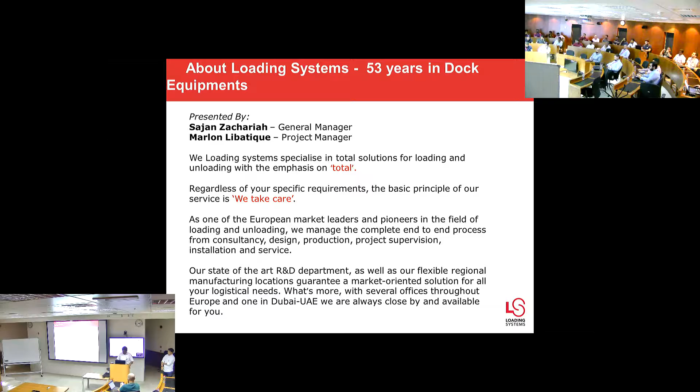So this company was established in 1965 in Netherlands. That means it's a 53-year-old company, and run by twin brothers, and it's still running as a family-owned company. And of course, we are one of the three major manufacturers of doors and dock equipment in Europe and in the Middle East, and we have factories.

We have got 3 factories, and the major factory is in Netherlands. The place is called Lelystad, which is an industrial area. So there we manufacture our dock levelers and dock shelters and all those dock accessories which you would see further down in the presentation, like dock lights, traffic lights, wheel guides, bumpers, wheel chocks, etc.

And then our doors are manufactured in Czech Republic. We have a very huge factory in Czech Republic, which manufactures almost 70% for our own use, and 30% we are even manufacturing doors for other vendors or other manufacturers from Europe, under their name.

And we have another factory in Germany which manufactures our manual drawbridge levelers. Few of you know that sliding dock levelers are coming from the German factory, including the lift tables, etc.

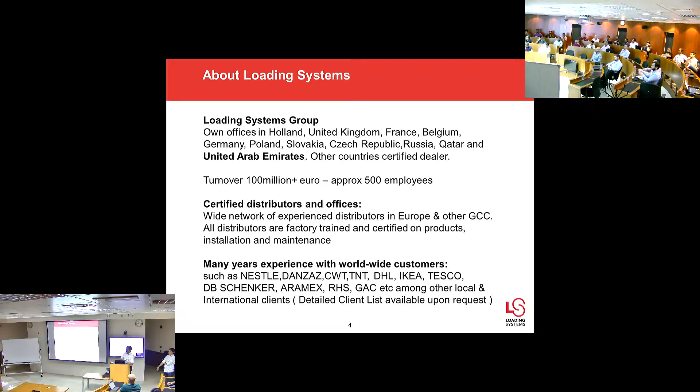So this is the scenario of our group actually.

By flexibility we mean result oriented. It's a result oriented company, and we make fast decisions. And as I informed you already, it is still running as a family-owned company. Even I can talk to the owners, even you can talk to the owners. So it's very flexible in our company, that down the line we are very clear. Anyone is anytime accessible, approachable, and we always talk with the customers.

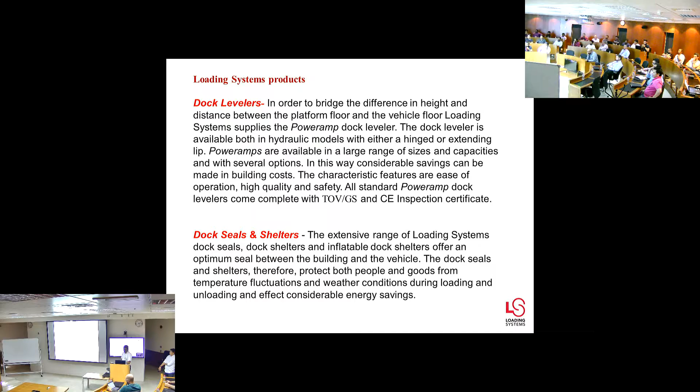Then we manufacture dock seals and shelters, which seal the container and the building in cases of special docking requirements like freezer environments, chiller environments. These dock seals give you protection against dust, contaminations, flies, etc.

And then we have a power lock. So power lock is a new item which I think we have not introduced in this market that much, because the requirement was very less. I will show you the video of the power lock, the functions of power lock.

Basically, the power lock is used when a truck is docked on a particular dock station and loading unloading is happening, and if it is still continuing, maybe the driver is going to pick up some items or is coming back. There are a few cases where the truck driver may not know that loading or unloading is still happening, so he may take the vehicle away. In our technical language, we say premature departure of vehicles, or vehicle creeping.

So this power lock is a lock which holds the truck even if the driver tries to move it. It's just like a stopper, but it's actually a hydraulic system which suddenly activates. The moment the driver takes the truck, it senses and it holds it back.

Then industrial sectional overhead doors, which are insulated overhead panel doors. You've seen these, they're always present in all of your projects.

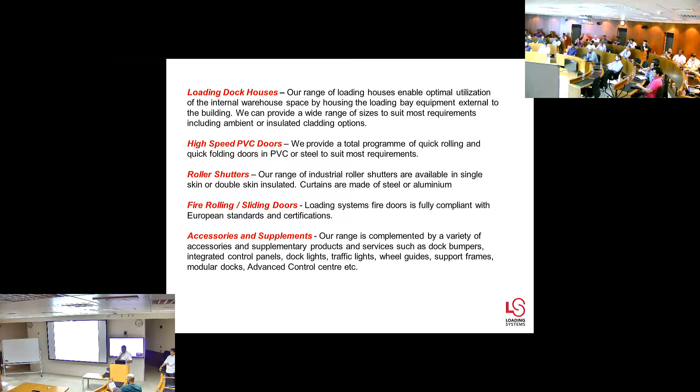So we have special doors which I'll come back to. Then we have the standard rolling shutters, then fire rated rolling shutters. And in fire rated we also have different types, like single skin fire rating roller shutters, insulated fire rated roller shutters, then fire curtains, and a few of your projects now ask for fire curtains as well. Then accessories which I mentioned before, like dock bumpers, traffic lights - red and green road signals, then dock lights, wheel guides, etc.

Anyway, I'll move a little bit quicker. Then I just wanted to show you the video of our factory.

This is our factory in Netherlands, which manufactures dock levelers and shelters.

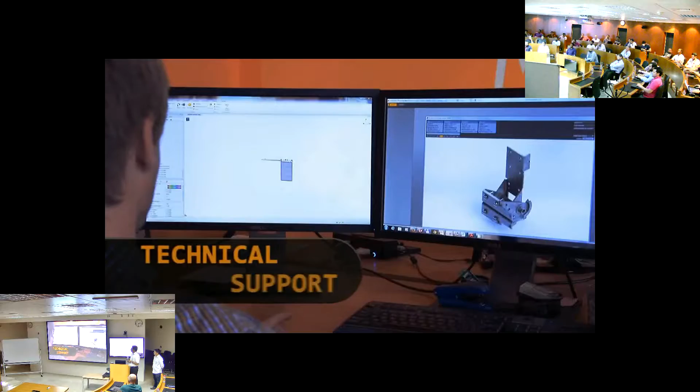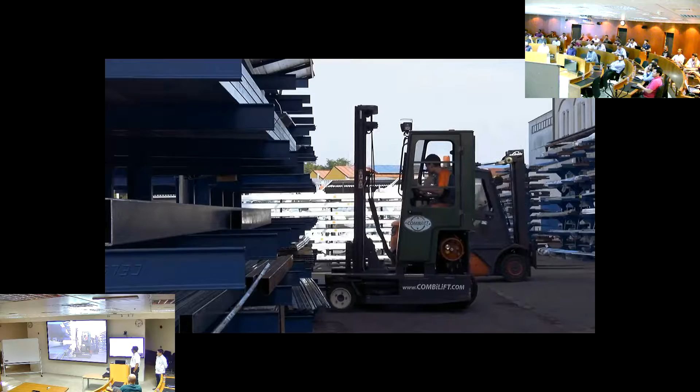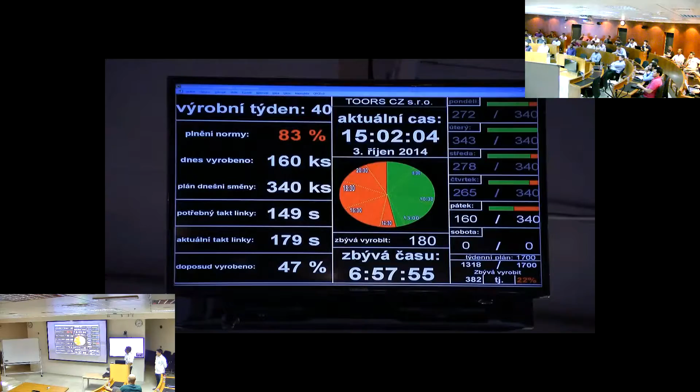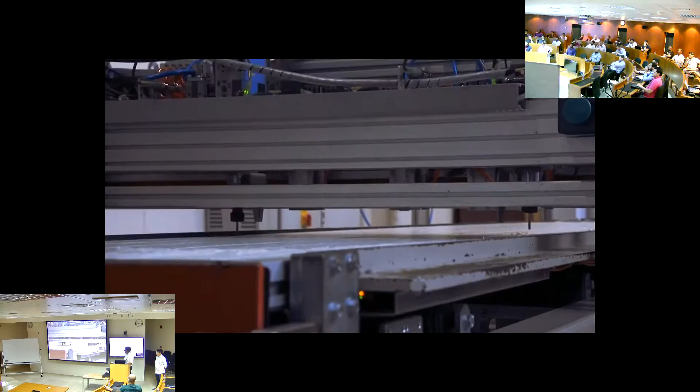Sorry, this is the door factory in Czech Republic. So that was our door factory in Czech Republic.

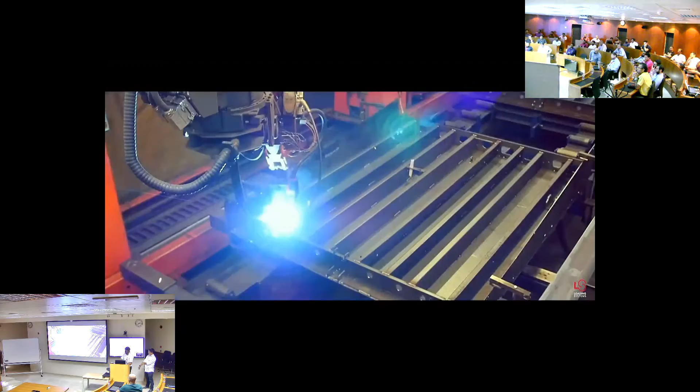Besides our own production facilities in the Netherlands and the Czech Republic, we operate from 12 international offices, which include Russia, Dubai, and Qatar. We manage the complete end-to-end process from consultancy, design, production, supervision, installation, and service. It is to supply our customers a solution for their specific situation around the world.

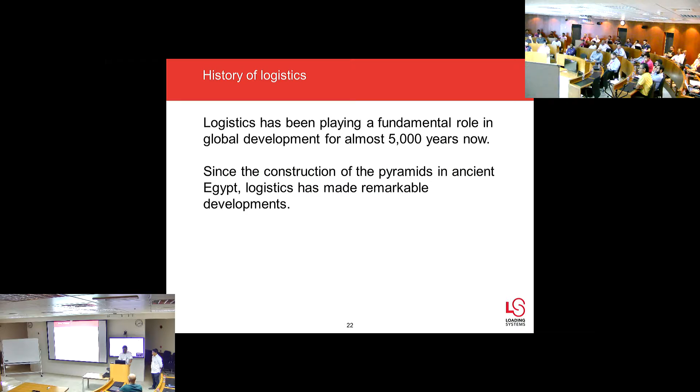So just let me take you through what logistics basically is. All this idea came from logistics - why a dock leveler is required, why a door is required, why do you need this or that. As you know, logistics has been around for almost 5,000 plus years. Logistics means production, packaging, inventory, transport, warehousing, security, material handling - everywhere logistics is involved. But we are talking about the material handling part of that logistics where we produce our items.

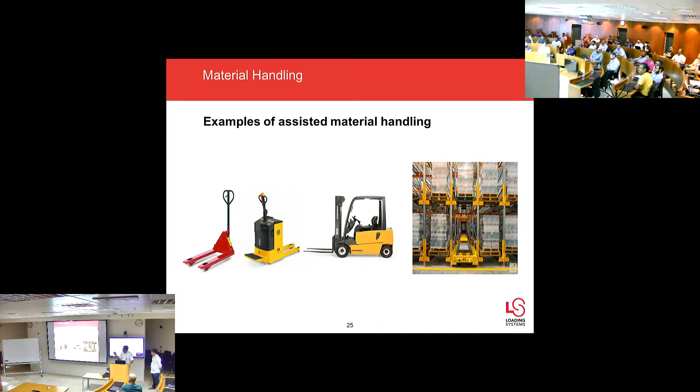And of course there are different types of material handling. You know these products already, which you are using in our warehouses for material handling. There is manual loading, semi-manual loading, and assisted material handling.

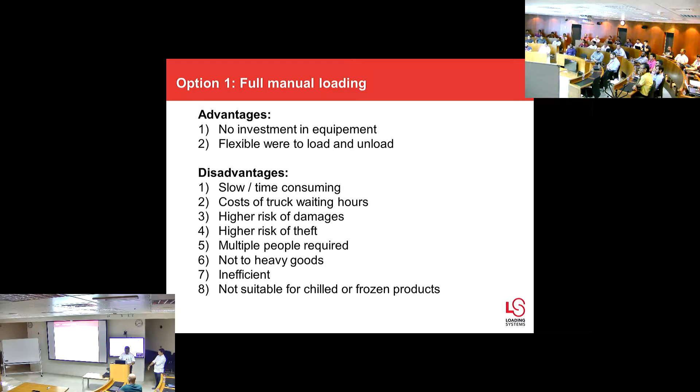They charge you more for the waiting hours, higher risk of damages to the people and materials, higher risk of theft, and multiple people are required for doing all these things. It's not advisable for heavy goods by fully manual loading. When you look at the current situation, it was totally an inefficient way of handling materials.

Not suitable for chilled and frozen products, where you have to go through a lot of safety hygiene standards. So just to show you how it was when you go for manual loading in the container, it takes 4 to 6 hours, minimum 3 people required, and you can't even add more people, they may cross each other.

This is just a photo of two people unloading frozen foods, which nowadays nobody would accept, this kind of loading and unloading with a human touch on food items.

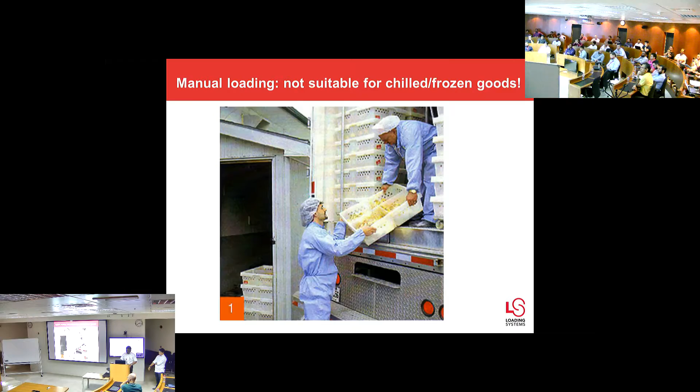Because of these things, the market has developed into today's requirement of dock levelers, fully automated dock levelers. You can see that even Amana is into a lot of warehousing projects with temperature controlled warehouses and cold rooms. Nowadays the trend of the market, even for the Middle East, the requirement is more coming on temperature controlled warehouses and logistics facilities.

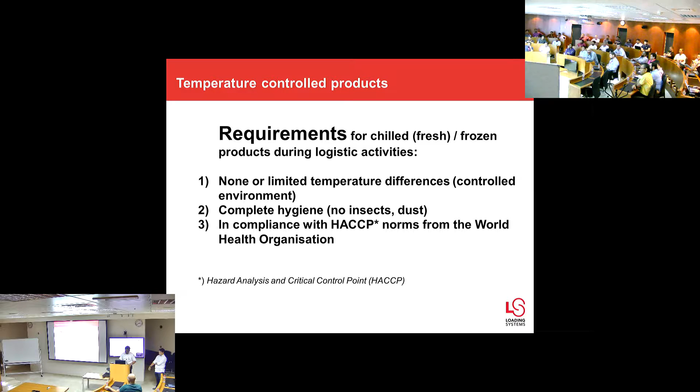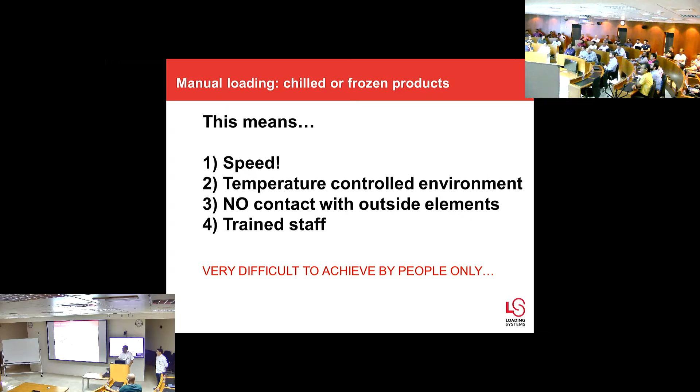For chilled and frozen foods, you need dock openings which can manage temperature control, and trained staff who will not allow any contacts with outside elements. The speed matters too, because due to business volume they need to move the truck very fast, and all this needs either a semi-manual material handling with the help of people and equipment.

Then comes the assisted material handling, which is the quickest way with the help of dock equipment. I hope most of you know what a dock leveler is. Just if you want, I'll show you.

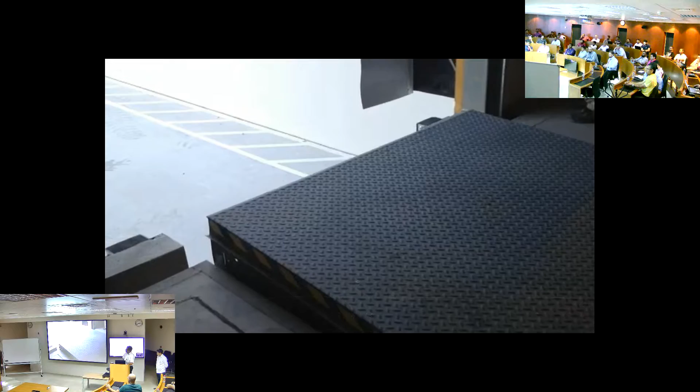So this is a photo, I think from one of your projects. I think this is from the Diesel Technique project video.

So this is one of the dock levelers. We have a telescopic lip which can even go to 1 meter from the warehouse floor. This lift covers the distance between the truck and the warehouse. You can take your forklift inside the containers, and it can go up and down to adjust the gap, the height difference between the warehouse floor and the truck, because nowadays the trucks are all coming in different heights.

Even some trucks from Mercedes have a very high truck bed. Some other companies like Amana keep different height levels. So for a warehouse where you get multiple trucks in, right from 7 ton to 10 ton, to 20 foot, 40 foot container trucks, and some high cube containers now, the truck bed is even going up to 1.7. The truck bed itself is 1.7 nowadays from Mercedes, used for freezer containers. So you need a dock leveler to adjust the height distances.

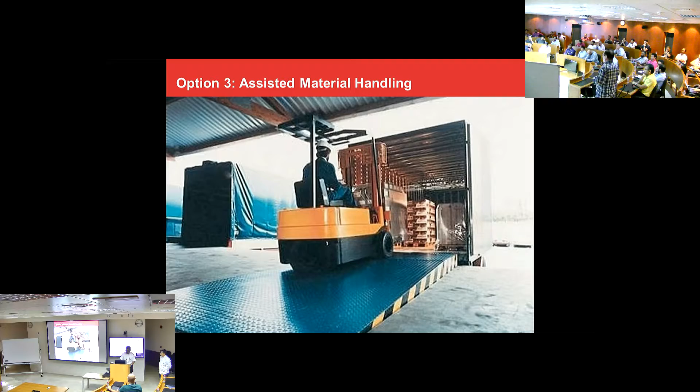Regarding advantages and disadvantages, since it is all automated, it is quicker, faster, and safer.

This is how a normal dry store opening looks like nowadays. We have a sectional overhead door, the white colored one, a dock leveler, and on the side you will see the bumpers. The truck hits the bumpers, which are rubber, and stops there. Then you open the door and start the dock leveler, which goes and sits inside the truck bed.

This is what we use nowadays for cold room warehouses, where you add a dock shelter, which you can see when a container is docked. That shelter is a manual arrangement, like a drive-through shelter, where the shelter flaps cover the container. So the temperature and energy are saved to some extent. It's not a 100% solution, but for a normal cold room or ambient temperature controlled warehouse, it is fine.

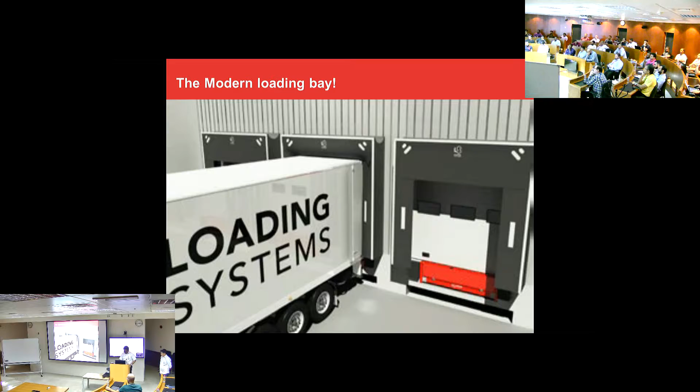This photo is from one of your projects, Diesel Technique, where you can see we have a dock solution where the doors can go up to ground level or even higher, so that the dock leveler is behind the doors. These are important when energy saving is a concern.

We used the same mechanism in another of your projects, Transmat. You can see the blue colored dock leveler. When you open the door, you will see the dock leveler; otherwise, the door is an insulated sectional overhead door that protects the outside and inside temperature when closed. When the truck comes, the door opens, the dock leveler is sitting behind the door, and then there is direct contact between the truck and the building.

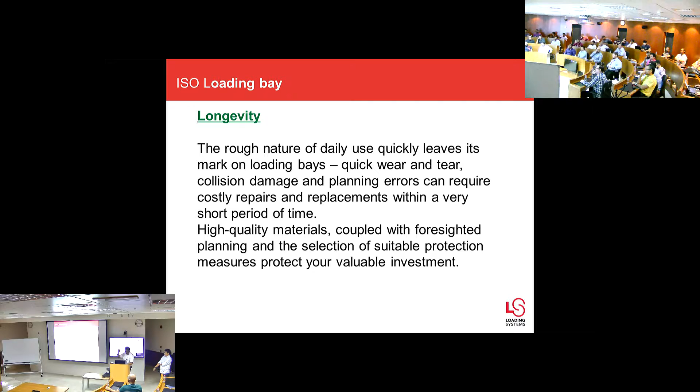Now the new trend is the ISO loading bay, where the door closes in front of the dock leveler.

I'm just introducing the products for now; we can go into the technical details later.

We also make doors. If the project requires it, you can have a door inside the door, like this main door, which you open and close only when required. Otherwise, people can use this pass door for going in and out.

This is what I've been telling you about, the ISO docking solution. The door comes in front of the dock leveler, where you can have a door closing up to the interlock level, or you can make a subfloor, keep the dock leveler on the subfloor, and have the door close over it.

This is the arrangement. This is basically the civil part, which the contractor normally does for us, like making the cutting for the door to pass up and down.

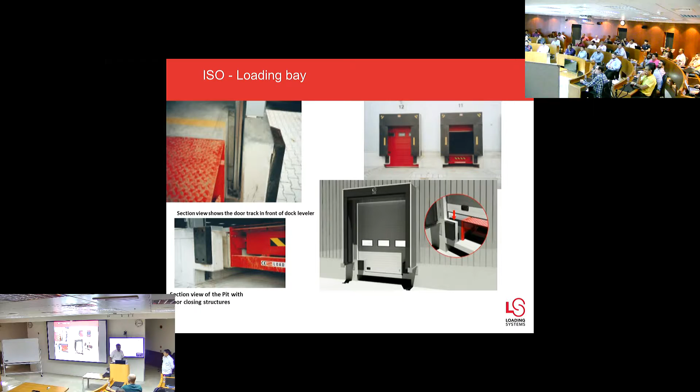In extreme requirements, we even do PU insulation underneath the dock leveler platform to avoid condensation on the platform. When the closed door suddenly opens in the hot temperature of Dubai, hot air pushes into the warehouse, making the platform wet. So we use PU insulation underneath the dock leveler to avoid that issue.

This is called stepped docks, which is the extended version of the ISO door.

We use the same modus operandi here, with the exception that normally the truck comes and docks, and before docking, the driver comes out, opens the container door, and then drives back or parks it in front of the dock leveler.

Nowadays most distribution companies don't want to do it that way, because we have sandstorms here, we have rain, and we have problems with food. When the driver comes for a 40-foot container, he walks all the way to the rear to open the container door, then walks back to the cabin. It takes time, and by then, if there's a sandstorm, sand or flies can get inside, especially with meat hanging in the container. A lot of issues can happen.

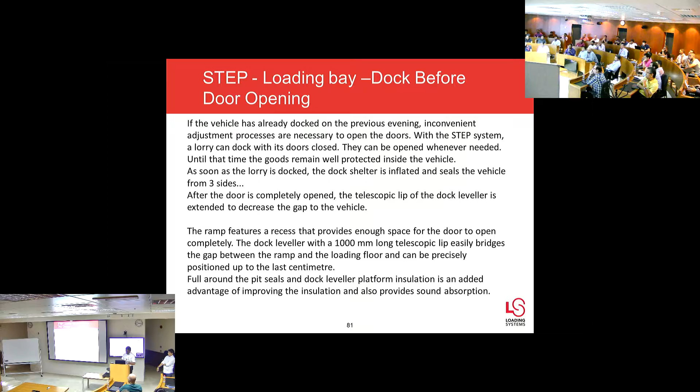Other companies call it by a different name. Basically, the idea is that the truck with the container is straight away in this arrangement. The driver doesn't have to come out and open the container door. He can straight away park the vehicle container to the dock, and the container door is in fact opened from inside the warehouse by the logistics people. So the advantage is that even at night, if a truck arrives, you can keep the container and take the engine out, or they can open it from the warehouse whenever they require. And if you open and keep it for even the full night, the room temperature goes into the container, making it the same temperature as in the warehouse.

So this is a new requirement. A lot of requirements are there even in the Dubai market now for these step docks, and we have already done so many projects with Amana in the same arrangement.

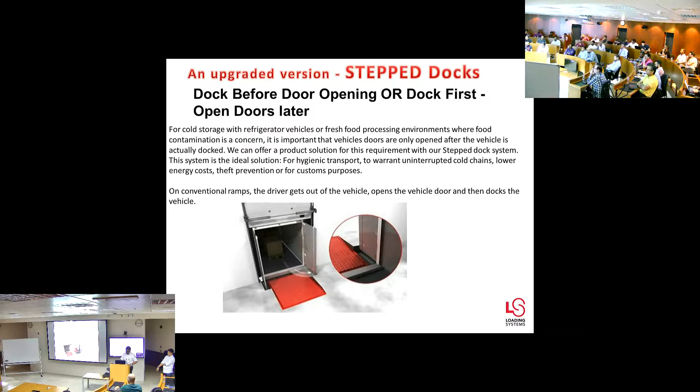And this is another thing I have been referring to before. Like now, the other challenging situation we manufacturers face is that before we had a special dock leveler for small trucks, and then a special huge jumbo dock leveler for big trucks. So now we have come out with a single solution. It's like a single dock leveler which can cater from a small HiAce type of van to a high cube container, where you can see you have the lip, segmented here.

Then you get it in 2-3 capacities, like from 2 ton to 6 ton. So when you have a small van or something like that, only the middle part of the lip will go inside. The international size of a container is basically 2.4 meters width. That is why we always make the dock leveler 2 meters or maximum 2.25 meters, keeping some clearance on the left and right sides.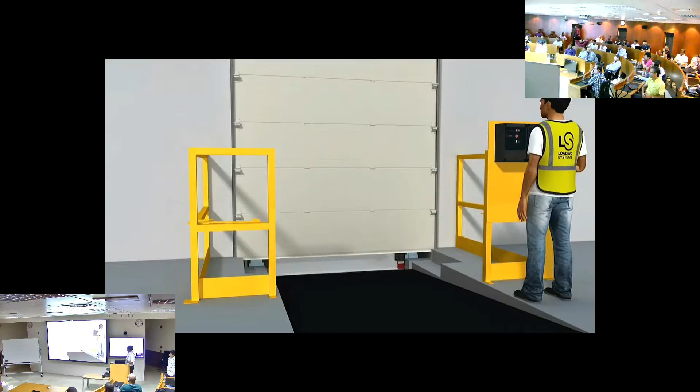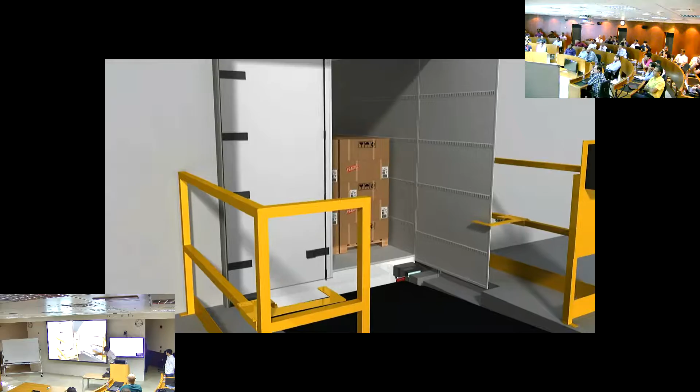This is just like a 3D view of the step dock system I have been telling you about, showing how a container door opens from inside the warehouse. Normally you see drivers opening the door, but here the warehouse guy is opening the container door. So you can see the lip going up, going forward, and closing the gap. This is why we call it a step system, because we are making a civil step there, so you can open the container door inside the warehouse. So now it is like a warehouse only - part of your container is becoming part of the warehouse, because it will have the same temperature.

You can straight away take your forklift inside and pull the material out. Yeah, that is how it works.

So this is the dock house which I have been referring to. As you see, the dock house is coming out of the building. Inside the dock house, we are fixing the dock leveler and the shelter. But there will be a door on the main building, and the door is inside. So you make this extension dock house with a subfloor for the dock leveler to sit in, and the shelter. Thereby you can save the inner space. Whatever space you have inside the warehouse, you can fully utilize that.

This is also good for an existing warehouse, where an old warehouse customer wants to upgrade to a container loading and unloading situation. Then this is the best solution. We can have a dock house, and even the civil work can be done, or we supply the complete steel structure and do the installation as well. It is all around cladded with insulated panels if it is temperature controlled.

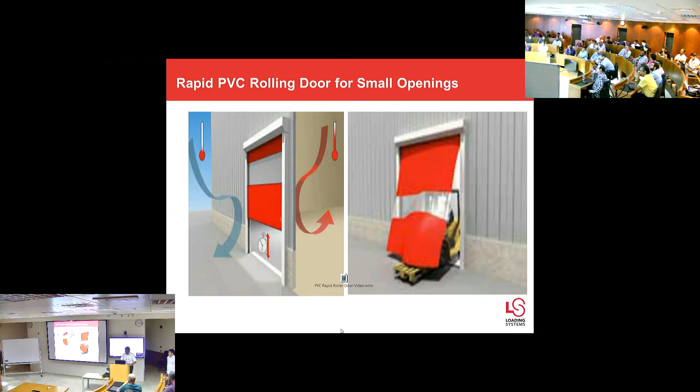It folds, stacks and goes up. Because of the wind bars, it cannot roll. If it rolled in windy terrain, the bars would rub each other, so it goes folding instead. We call it folding high-speed doors.

This one can be insulated, but there is a limitation, maximum 4 mm thickness only. Externally you can use that, yes, but as I told you, maybe not good for Dubai weather. When you have 45 to 50 degrees, it won't be that good, because at the end of the day, it's a PVC material.

But of course, when you have a dock house or something like that, we have installed these doors outside, but in those cases they have a canopy, an open canopy for the container to load. Apart from the building, you have the canopy where the trucks park. So in that case it's not directly exposed to sunlight, because these doors can't be kept directly exposed to sunlight due to the PVC nature of the material.

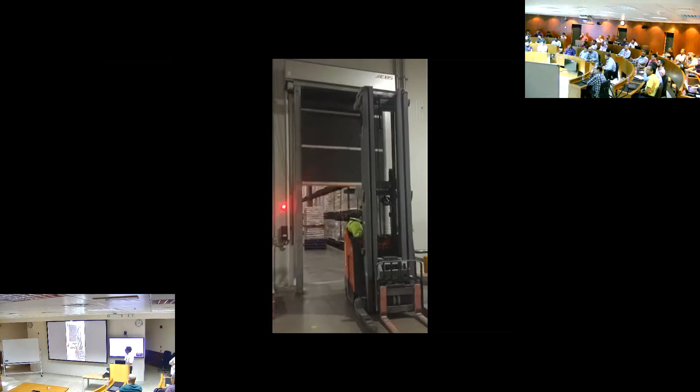This is our freezer door, which has a 30 panel, and it can work down to minus 30 degrees. These doors are now replacing our conventional sliding freezer doors, and since it's automated, it can work up to 2.8 meters per second, replacing the conventional sliding doors you have seen in cold rooms, freezer rooms and similar places. It's a freezer door, and you can install it to work even down to minus 30.

If the machine part and control box are on the freezer side, the cold room side, then you have to have it with a heating element. In some cases, like if it's +5, you don't need that. But it's still always better to have a heating element, because at night, if there's a power dip and then power comes back, ice can form on the floor, and later when power returns and you operate it, it cracks.

The heating element goes all over, including inside the channels. Inside the channel, yes, but for the floor, we always tell the contractor to do that. That part is from the contractor's side because of the cutting involved and the mechanism. But for the door itself—all three sides, channels, motor, inside the hood, control box—everywhere you will have the heating element. Even the floor we can do, but since it needs civil cutting and plastering, when we do the plastering it won't be at the same grade as the rest. So normally we give that scope to the contractor, provide the drawings, and our supervision will be there, but we ask the contractor to do that work.

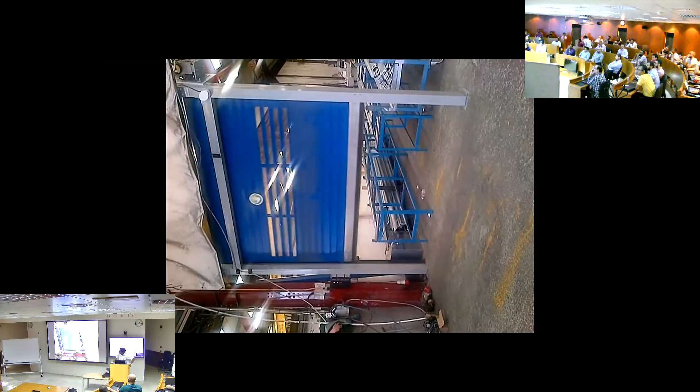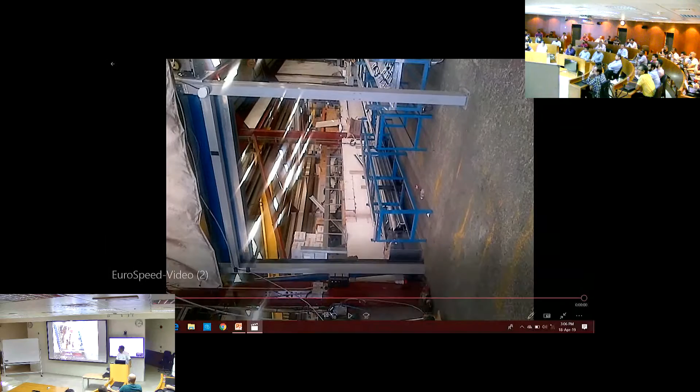When safety is a concern, like for an external door, you cannot use a PVC speed door outside. For a totally external application, you go for the steel insulated high-speed door, but only at 0.5 meters per second because of the material—it has interlocked slats, so you can't have too much speed on that.

This slat thickness is about 25mm—20 to 25. In the middle part it's 25, but that's because of the design, since the joints are interlocked.

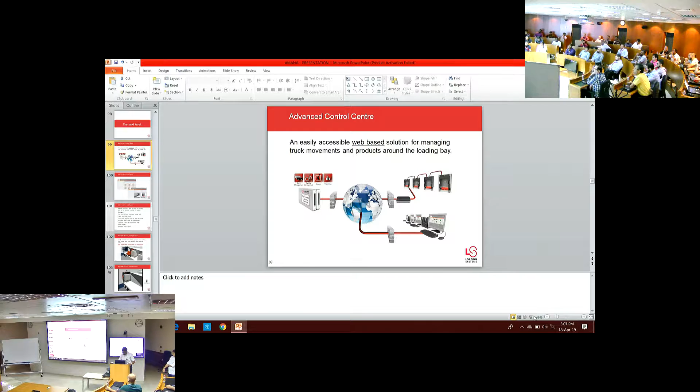Then coming back, these were our products actually.

Now coming back to our service part, we have introduced this advanced control system where you can control all the doors, like the BMS. It can interface with your BMS system. Apart from that, the client's logistics manager or operation manager will have control on all our doors and equipment by sitting in the room, looking at the computer or laptop screen.

He can see what is happening on the door, maybe some doors by mistake due to power trip or something like that are open, even in the night. You can see from your system that if you have 10 doors, door number 2 is open for some reason. So you can see it from your system.

And also for maintenance, this is good. This software gives you the indication when you need to change the rollers, when you need to change the springs, because every accessory has a product life cycle. Even the panels, the springs, the rollers, the cables, everything has a life cycle. So this software in the system will tell you when to change, when to call for service, if it's due.

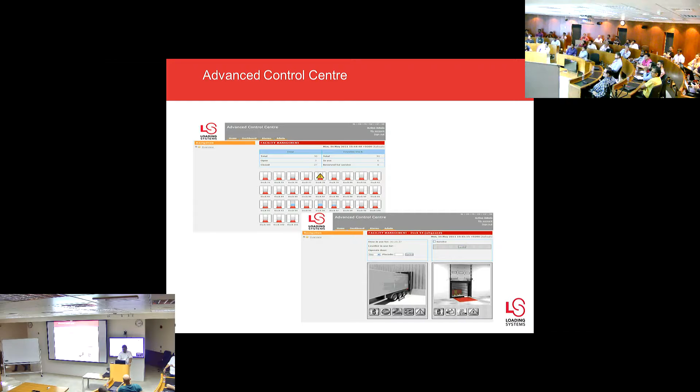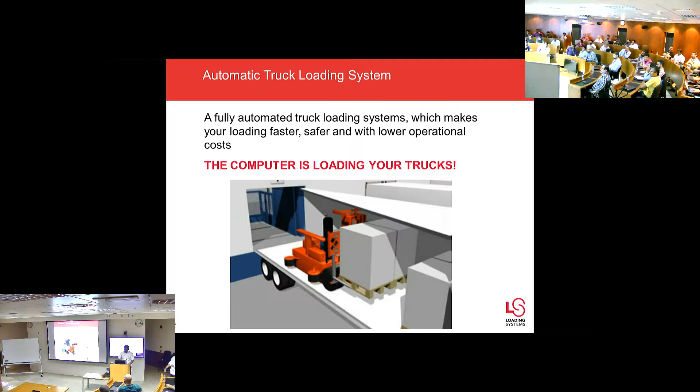This picture you see is the completely automated loading and unloading system. We have software for that as well, but I tried it in a few projects here and it didn't click because the cost involved is so high. But in Europe, for companies like IKEA and Tesco, they have done this automatic truck loading system as well.

This advanced control system, you can see the video which explains more on that. This is basically a loading system software.

Even you can open and close it by sitting in the control room. You can open the door and close the door.

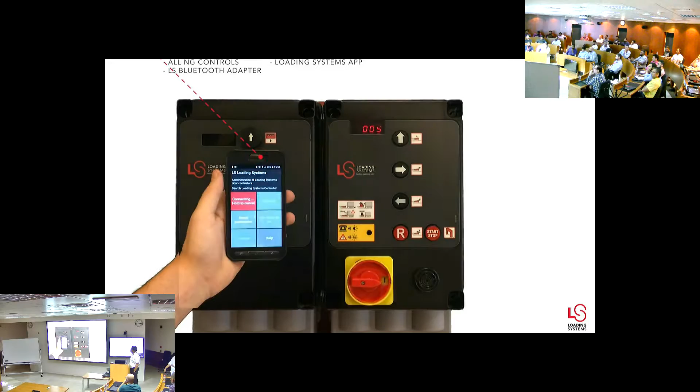So the number which is displayed is the error number. When you see that number, we know what to do, and we normally educate our clients also on what that number represents, so you can attend to the problems.

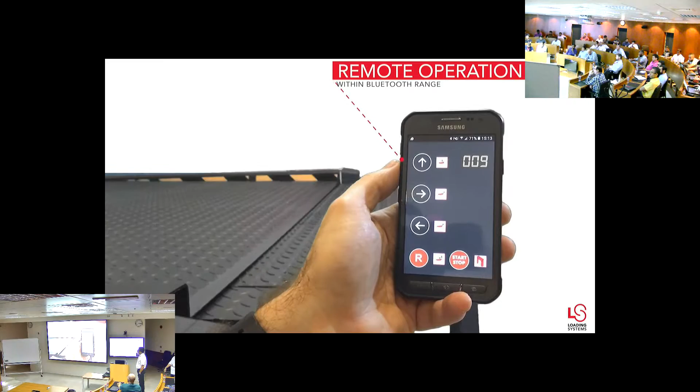That marketing video is a bit older actually, but it has already gone through.

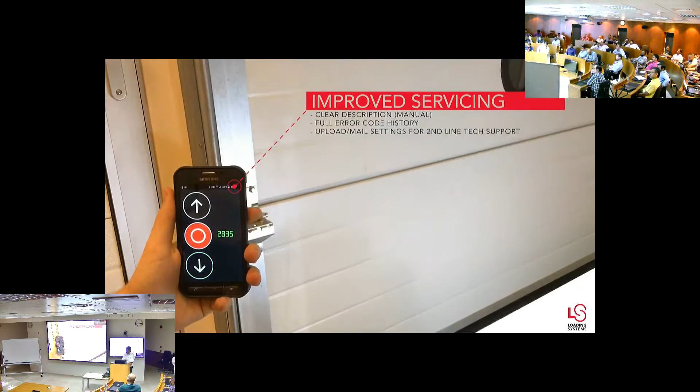So do you have any questions so far, any doubts, by the time it gets back into the action?

Yeah, we have the timer, which is standard for all our sectional overhead doors. That could be some cabling issue actually, but normally our control board is equipped with automatic closing. The opening is always with some activation, a push button or remote, whatever it is. Then you have the timer adjustment for closing. You don't have to wait for it. Opening is dead man operation, meaning you need to press the button or remote or whatever it is.

Yeah, for cold storage, of course. We do automatic opening, like every 1 hour it will open once and close, to avoid freezing. That is there actually. If it's extreme climate, then we do that even every half an hour, even at night time, the door opens and closes, just to avoid freezing at the bottom. Normally the water drips and later it can turn into ice. Then, as I was telling before, it holds back the curtain and the curtain may get damaged. So to avoid that, in addition to the heating element on the floor, we do this automatic opening and closing throughout the night, every half an hour. That's what we normally set for that - it just opens and closes, that's it.

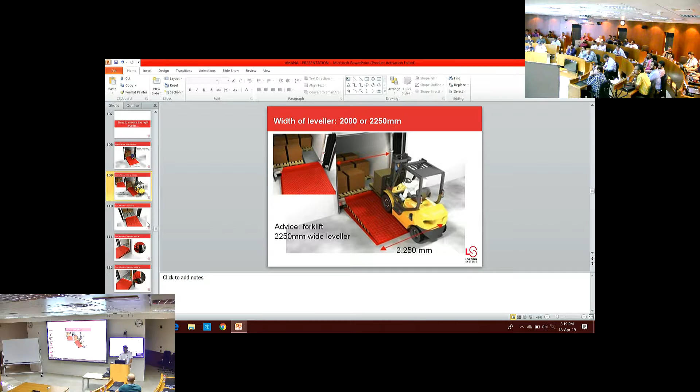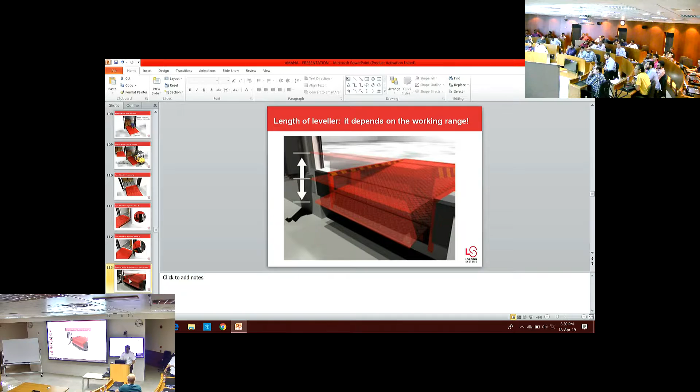The same thing, another way of doing it is segmentation of the lip. For this loading system, we always recommend this one, because the less mechanism there is, the better the life. This one is just a single lip taper, so it serves the purpose. We do the same thing with this arrangement also, where the lip is cut into 3 pieces, so the center part will go away if it's a small vehicle. At the end of the day, you'll have 3 loose parts which can eventually cause problems. As I told you, more additional mechanisms mean more trouble, so we always try to reduce the mechanism. This is just a working range to show you.

Then, depending on the equipment used inside the warehouse, we determine the angle of the lip and the platform. For example, if you have a forklift, normally it should have an angle of 10%, which is always there. Our standard dock leveler comes with a 10 degree angle calculation, basically used for manual operation and forklifts.

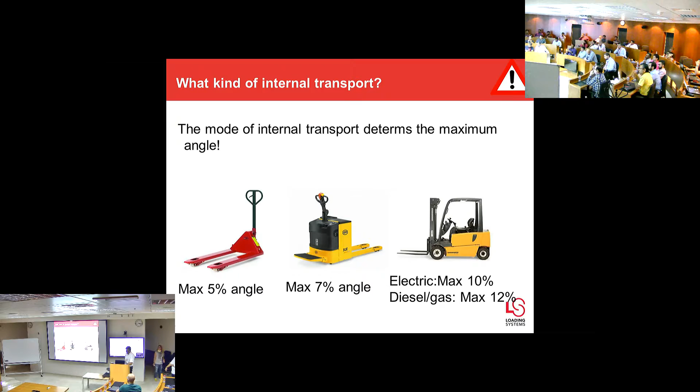And for the weight, total weight, we have a 6-ton capacity dock leveler, then a 10-ton capacity dock leveler as standard, and we do make even 15-ton, 20-ton dock levelers based on requirements. As I said, if there's a requirement for a paper roll factory and such, you need a jumbo dock leveler with more capacity, so we make that.

And these are some of the pits - you see, and you make also, even precast, which you've started making for most projects nowadays. This is the one we normally go with, it's called a subfloor pit, where you see the dock leveler sitting on the subfloor. And the first one is an open pit, and you can still fix the dock leveler there.

The advantage and disadvantage between these two is: in the first open floor, the waste and dirt will go to the interlock level, and it's easy for maintenance. For example, if your platform is 1.3 meters, someone can go underneath and do maintenance, because all the mechanisms of the dock leveler are under the platform. So when you have an open pit, it is easy to go under the dock leveler and do the maintenance.

From the hygiene part, if you have a dock leveler handling juices, and during handling a bottle is broken, the juice and sticky substance will go into the interlock level. In this case it will go and rest on the subfloor, which needs cleaning, but strength-wise this is always better. The pit with the subfloor is always the recommended one.

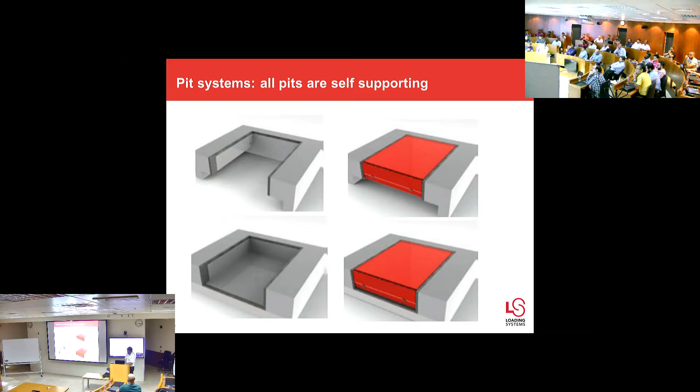We do give this box also, as a part along with the dock leveler, based on the requirements. But in normal cases we just give the dock leveler and you, the contractor, make the pit. Sometimes if there is a requirement we give the dock leveler in a box, so you can just buy everything and save your time, just buy the dock leveler with the fixing box. So you just place the box and concrete it.

So this is the typical dock design, but it depends on the project. As I was telling you, we are involved in the designing part also, based on your drawings, your requirements, your area constraints, and project constraints. Sometimes you have a warehouse with less space or less distance to the gate. We have many solutions, like zigzag dock designs, 90 degree, 180 degree dock designs.

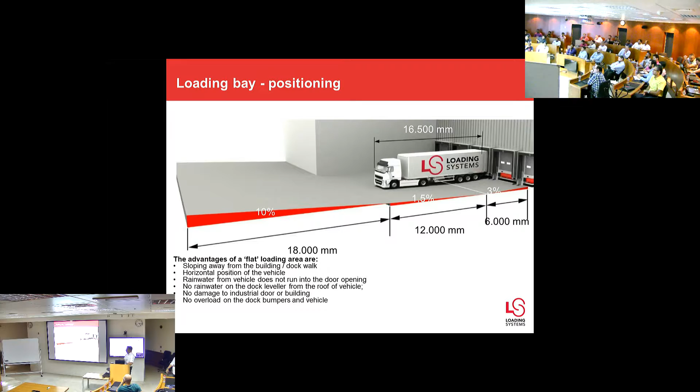This is the typical dimensions we are using for proper dock arrangements, where you can see a normal truck with a 40-foot container is 16.5 meters. Then you need another 18 meters for truck maneuvering. So if you have limited space, you need to rearrange the dock designs.

This is how it goes, and just for technical drawing information, this is the standard distance we keep, 4 meters from center to center of an opening. This will be ideal for any truck with a container. If you keep 4 meters from center to center of the opening, that is good.

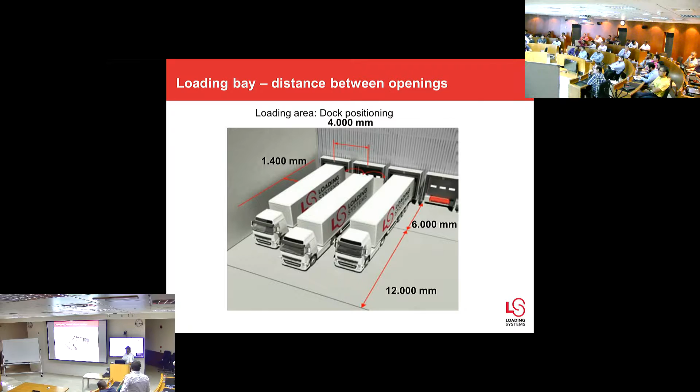The tailgate goes underneath the subfloor. That is why I have been saying you can make the pit with the subfloor - the tailgate of the truck goes under the subfloor. If there is a tailgate truck, you can't take the truck closer to the dock actually.

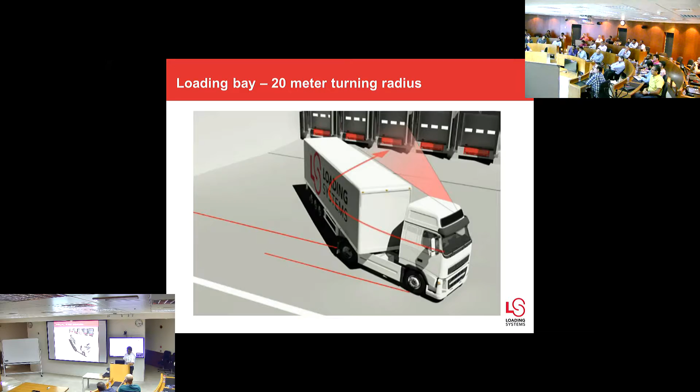And if there is a slope roof, we can even make the track following the roof. If you have a 5 degree, 10 degree, or 15 degree slope roof, we can make the door track following your roof to save your area. Because if you have a slope roof and you make the track follow it, you will get that much extra space. What normally happens is that if you have a slope roof, like a typical warehouse, it is like this, and if you make the roof track also...

We can give you a door which goes like this. So what you normally see is the door either going direct, or if there is no enough space, it has to turn like this, thereby limiting your utility space. In this case, you can use this much more area.

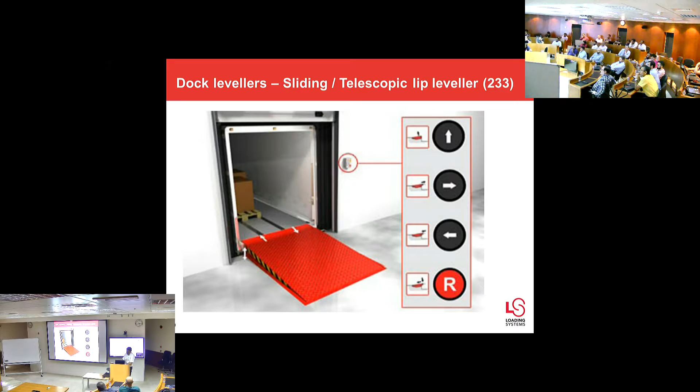So different kinds of tracks are available for our doors. And dock levelers, as I told you, we have two types: one with the hinged lip and the other with the sliding lip, which we call telescopic lip. The hinged lip goes up and down, and the telescopic one goes forward and backward.

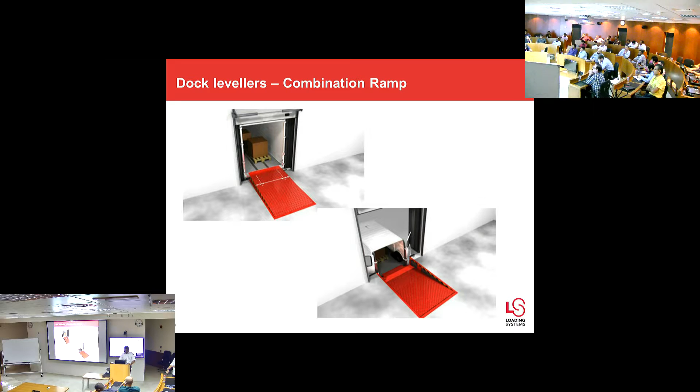You can address this issue the other way also. There are other ways to compromise on the price as well with a standard dock leveler. You need to make some adjustment on the loading platform height. In that case, you can go with the standard dock leveler actually.

So this is the door with the ISO arrangement, where you see the door in front and dock leveler behind. This is a stepped dock leveler where the container door opens inside the warehouse, thereby saving energy and keeping the container inside more hygienic and at the same temperature as the warehouse area.

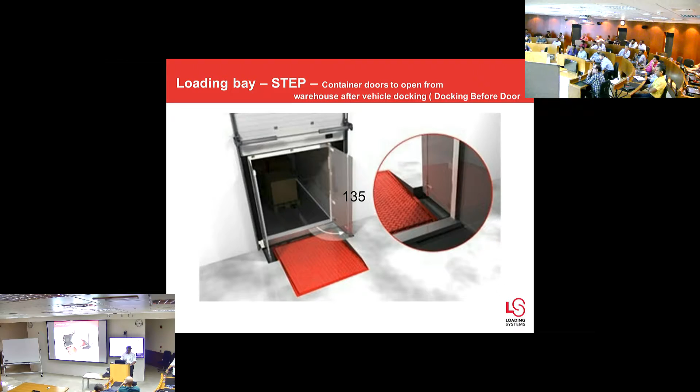Then you have the dock shelter. This is the manual shelter we call it, like a drive-through shelter. Our shelters are always made for impact actually.

So at least, you are not providing shelter with the airbags?

Yeah, we have that, I'm coming to that picture. Yeah, this one also has that drainage system in case of rain. Then I'll come to that, sir. Next photo is that, yeah.

Then we have a shelter where you can see a big truck on one side and a small one here. So it's challenging for manufacturers to give a single solution for all these things like dock leveler. This is the system we use, and have done in many of your projects, where the center part is a roller blind actually. That roller blind can reach even 2.5 meters, if you have a big truck and a small truck serving in the same pattern of dock equipment.

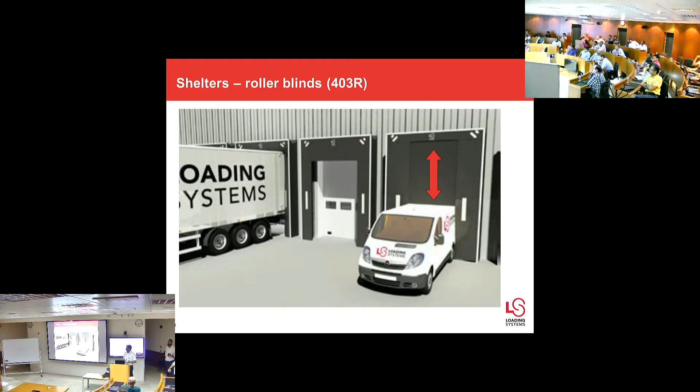So when you have a combi control, the advantage is that you cannot straight away go and operate a dock leveler before opening the door. You have to follow the sequence actually, thereby saving the mechanisms and giving the product a longer life. So you open the door first, then start the dock leveler. If you have a shelter, the shelter will cover the container first to protect it, then you start the sequence.

This gives almost, still not 100% protection, I would not say. You can't have that 100%, but at least 80 to 85% protection is there with the inflatable cushions. And it is sensitive, like a balloon shelter. The maintenance is more on this, but you need it if it is a cold room. You don't have a choice, most air conditioning requires it.

There's a big problem for infiltration, also a lot of gap from the corner sides. I can show you that, actually we are doing that. I think in my product now we have come up to the gap which I know, from the corner sides. We have a system, like another accessory, which covers that gap also.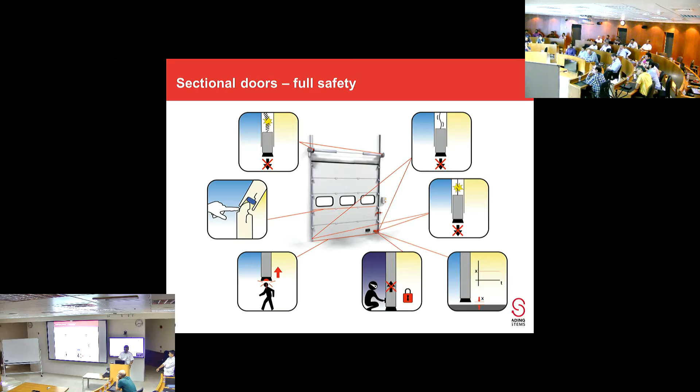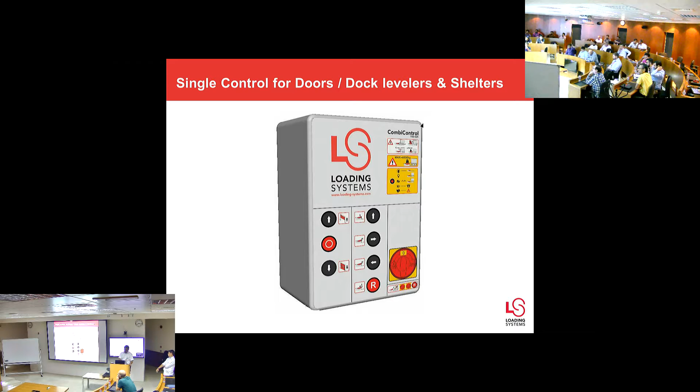So this is the control board. This is a combi control box, a single box which operates all, the door, dock leveler, shelters, and all accessories. Then we have the door panels. 40 mm panels are there, 80 mm panels are there. We use 80 mm panels for cold rooms because it has better temperature efficiency.

What's the U value of this? For the 40 mm, it is 0.50. For the 80 mm, it is 0.29. That is the maximum we give, because since it is a sliding folding door, 80 mm panel is the maximum thickness you get in sectional overhead doors.

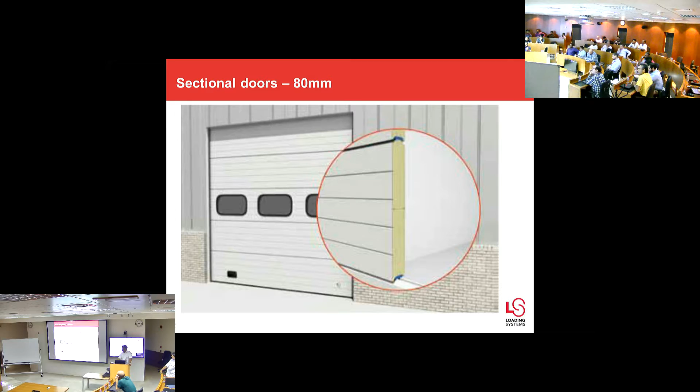Can it be made in non-standard sizes, 50 or 60? No, we don't have those panels, because then we don't have the accessories for that. It's not available in the market either, because the tracks are maximum 80 mm. I think Loading Systems is the only company that even manufactures 80 mm. My competitors have only 67 mm or something like that, because we are the only ones who give at least 80 mm.

And about the designs, we have 2-3 designs on the panels, like stucco, plain, and also window designs. With windows you get different sizes, oval, rectangle, smaller windows. If there is a cold room, we give small windows. And then you have full width windows also, which is normally used for showrooms and similar. You can even have a full panel with windows, where only the bottom is the normal panel and the rest is full window panels.

Can you have any windows that are vertical? Vertical, no, because our panel's maximum width is only 600 mm.

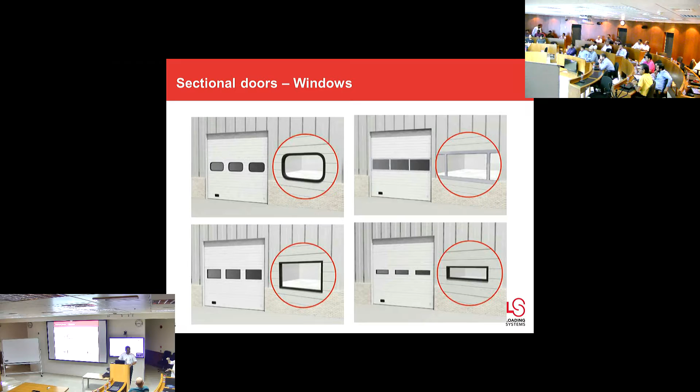Yeah, this is the thing. Maximum this only we can do with the full windows. This is basically used for the showrooms, and these are all aluminum frames. You can give the colors and all. Mechanism is same, but only these frames are different.

Then we have just introduced this fire-rated insulated sectional overhead doors. It's still not in the market. Like our fire-rated rolling shutters, we are just coming up with fire-rated insulated sectional overhead doors. Then we have fire-rated roller screens.

Is it introduced or will you introduce it? It is going to be introduced, yeah. It's still not there actually because so much of approvals are still waiting. What is the rating? 60 minutes? 60, maximum 60 only.

What's there is not approved yet? No, not approved yet. But anyway, normally any of our products, we don't have this local approval, because people like us, we are all from Europe, the manufacturing is from outside. So we have international certificates only, which is valid. In Dubai, at least it is all valid for the fire department. DCD always approves by a circular, they have given approval for all the international certification, which I have the copy of.

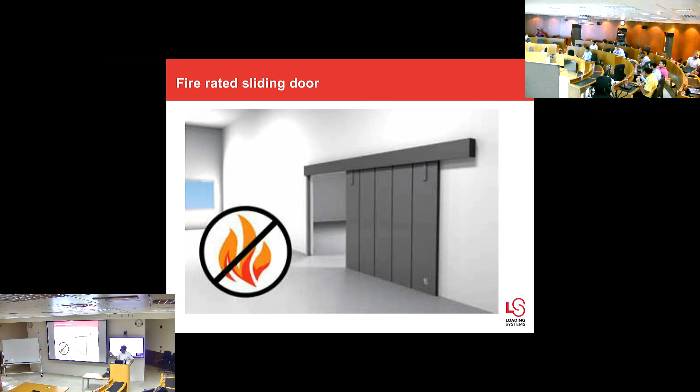Then high speed doors, high speed folding doors, this all we have seen already.

Then this is the traffic light, red and green, which we use in fully automated docks. This is an indication for the driver to dock when it is green. When the truck is docked, automatically the red light will blink on so that people know docking is happening there. The reverse happens when loading or unloading is finished. Once the truck moves away, the light goes back to green, indicating to the next driver that the dock is free. The reverse light will be showing inside.

Inside the warehouse also we give the dock light, sometimes the same unit, sometimes a small red and green indication lamp on the control board itself.

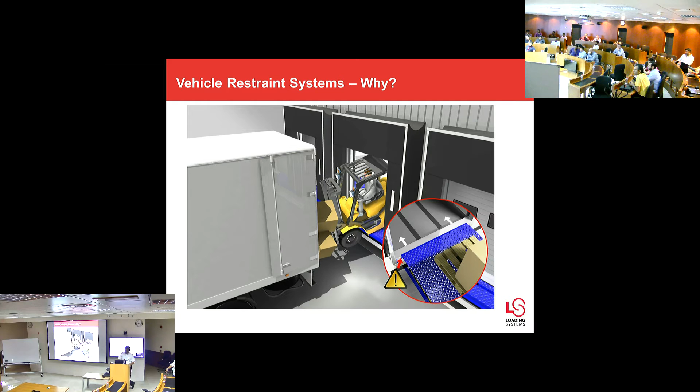See, this is what normally happens actually. The driver may not be seeing that the forklift is coming. So within a fraction of a second, the forklift is coming and the driver is taking the truck away. This can happen. So that restraint video, I will show you the purpose behind it, because if the client has the budget, it's a good thing — just for information, for those who haven't seen it before.

Again, this is a hydraulic system. It is as expensive as a dock leveler actually, even though the system looks very simple. You can see there, as well as on the small window.

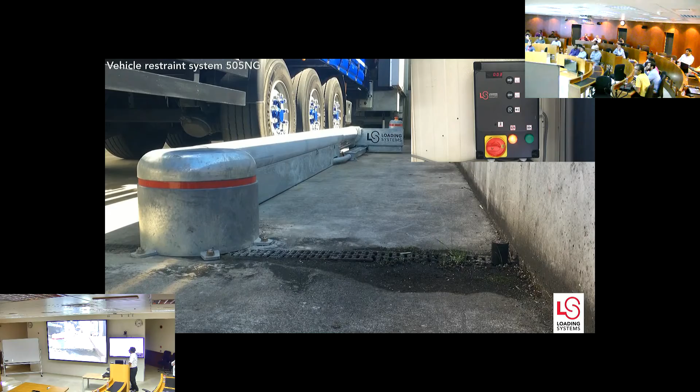So the truck is parking, then automatically once you activate the sequence, this will go and stop the truck first, so that you can see — this will come, it will sense the tire's last portion, then that lever would come out in between the tire. It goes, then it presses it back — presses the truck even back to the dock with its force. So now it is locked. You can't move it until you release the button on the control box like this. You can't take the trucks.

Once it is removed, you get the green signal there on the traffic light. Then from the rear view mirror, the driver can see, okay, it's green, now I can go.

Then we have a lift table like this. Normally you can see that when you have a scissor lift where you need a high working range, or loading and unloading from the warehouse floor happening, you need a scissor lift because the dock leveler has some limitations. This is good for distribution houses where you keep small stuff. It can go to any working range, even 4 meters. Sometimes you need stacking of cartons, boxes from ground floor to the mezzanine, even 4 meters, 5 meters — you can have the lift table.

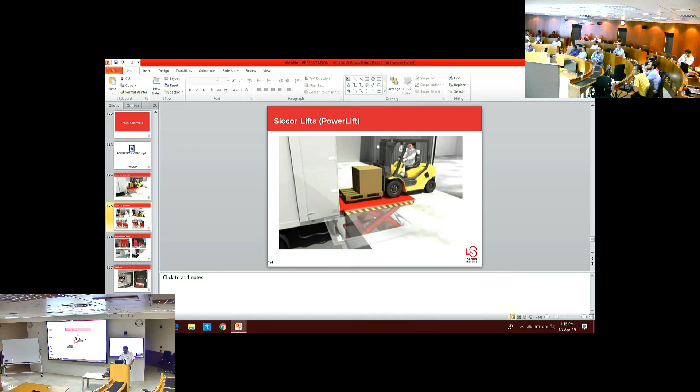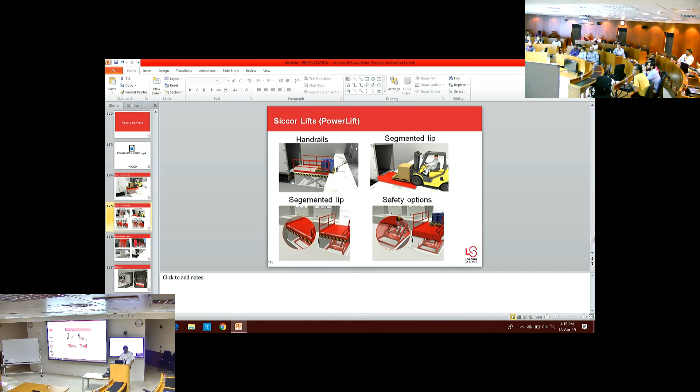So it goes up and down and comes back, like this. So sometimes you keep the lift table on the floor, sometimes in place of the dock leveler. You can use it as a replacement to the dock leveler as well.

Then we have the mobile ramps for ground loading, which is like 11 to 12 meters in length in total. If you don't have a proper load dock platform, then you can use this mobile ramp.

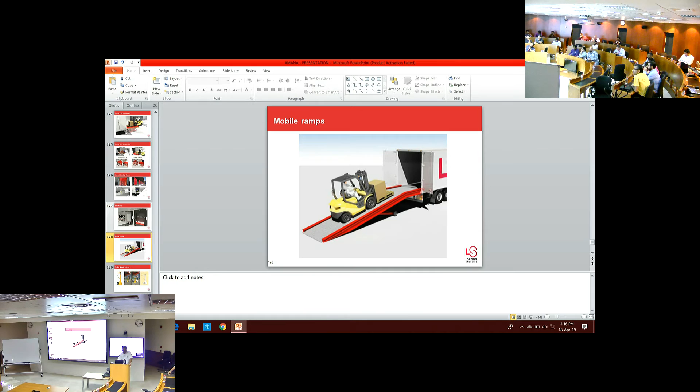Then standard rolling shutters are like this. We have a continuous profile rolling shutter and interlocked shutter. This one is interlocked, which we use for heavy duty applications and larger sizes.

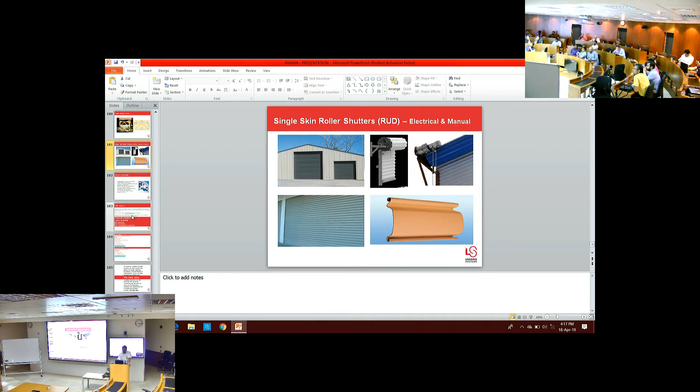So we are coming to a closing now. Loading Systems is one of the European market leaders, and as we have seen, we are into every aspect of loading and unloading equipment business. In this office we are fully equipped for annual maintenance contract services, and 24/7 is available.

We have some very special packages for the annual maintenance contract as well. Once you are into an AMC contract, you get parts at discounted rates for major parts which are damaged by accidents or something like that. Otherwise, we have packages starting like 2 visits in a year or 1 visit in a year, with all throughout the year, anytime call out services.

So these are all free actually, which can be prioritized for availability of the parts, because when we have an AMC contract, we keep parts specifically for that project separate. We don't touch those parts. So we know what could be the normal parts requirement.

For example, IKEA. We have special IKEA parts always in our store. We know what is required always there. So the moment they have a problem there, which is outside the AMC contract terms, we do it, because since they have an AMC contract with us, it's still running. Every year they renew that AMC contract, so it is still running. So we don't trouble them. Whether it is accident damage or something like that, we still attend on the spot.